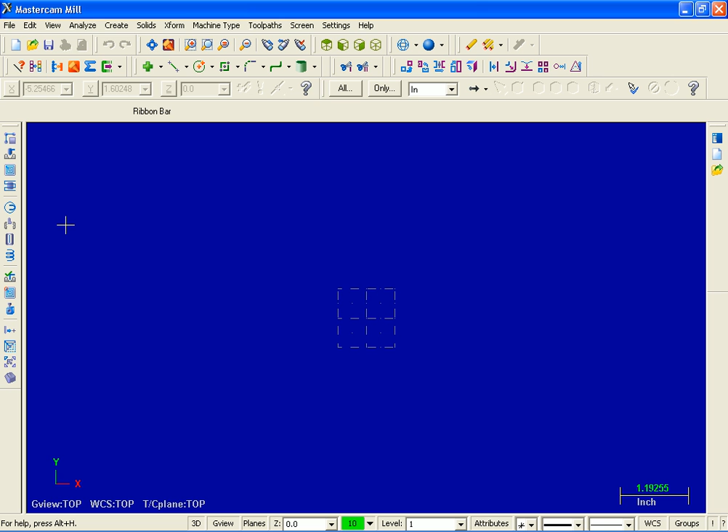I've moved up to the top left hand corner of the screen and I'm going to select the new part icon. Next I'm going to hit Alt-O on my keyboard to turn off the operations manager. It works just like a toggle switch. If I hit Alt-O again, it will reappear. The center of this grid is x0, y0.

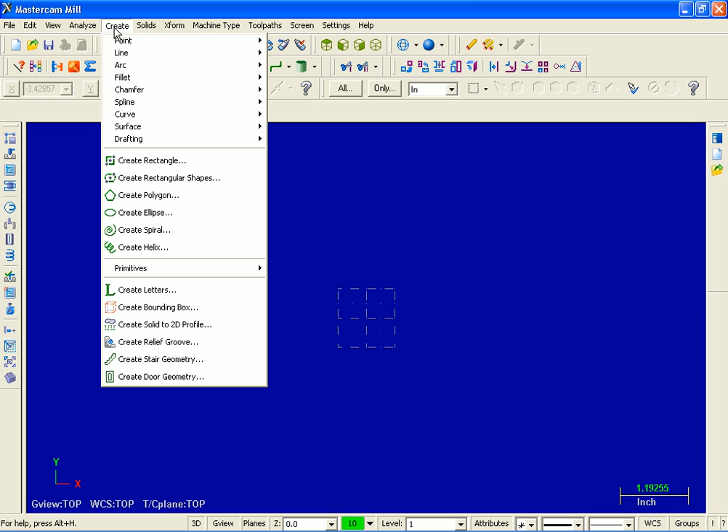In step 1 we're going to create half the outside boundary. What I'm going to do is move to the top of the screen and select Create, and then move on down and select Create Rectangular Shapes. The first thing I'm going to ensure is the radio button beside base point is turned on. Next I'll input the width and height of this rectangle.

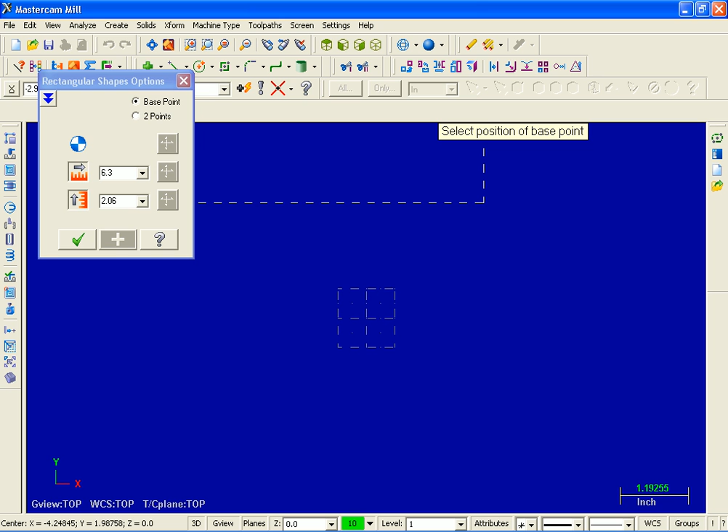I'm going to move on down and click in the white space for width and type in 6.3, enter. Next I'll move on down and input the height, 2.06, enter. Next I'm going to select the double arrow to expand the rectangular shape options. Moving down to the bottom of this dialog box in the anchor section, I'm going to select the upper left corner radio button as the anchor for this rectangle.

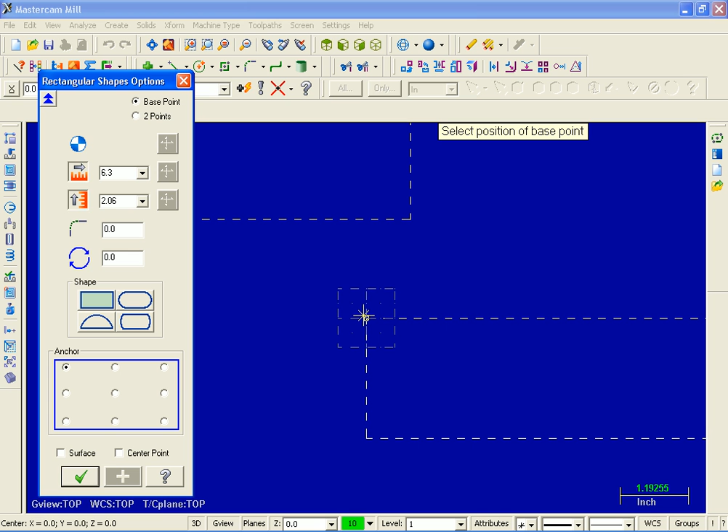As you can see on the graphic screen now, the anchor point is the top left hand corner of this rectangle. Now I have a prompt on the screen: select position of base point. What I'm going to do is pick the center location of the grid, the origin. Moving back to the rectangular shapes options dialog box, at the very bottom I'm going to select the OK button. Next I'm going to move up to the toolbar and select the Fit icon.

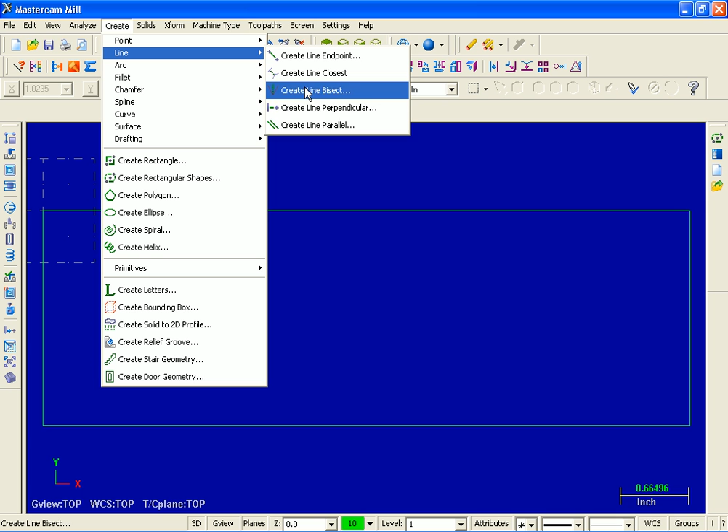Let's move on now to step 2. We're going to create the inside geometry. We're going to create parallel lines. I'm going to select Create Line, and then right at the very bottom here, Create Line Parallel. The prompt on the screen, select a line. The first line I'm going to pick is this top horizontal line, so I'll select it. And then the next prompt, select the point to place a parallel line through. I'm going to pick a point below this line.

Moving on up, I have to input the distance. Its distance is already highlighted. I'm going to type in 0.8, enter. Everything's looking good. So to continue using the same command, I can select the Apply button. To exit the command, you can either start a new command or select the OK button. What I'm going to do is select the Apply button.

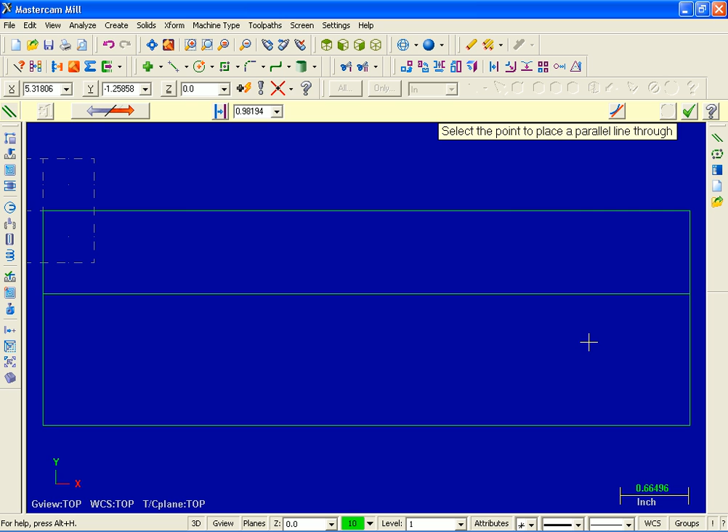Now for the next parallel line, when prompted, select a line. I'm going to select this right vertical line, and for the next prompt I'm going to pick a point somewhere to the left. Next I need to input the distance. The distance is highlighted. I'm just going to type in 0.94 and then hit enter. Everything looks good. I'm going to move up and select the OK button.

Next, we're going to do some trimming. I'm going to move up and select Edit, Trim Break again. I'm going to move down to the graphics screen, and when prompted, select the entity to trim extend. I'm going to select the vertical line on the left. For the next prompt, I'm going to select this horizontal line. As you can see, part of this vertical line has been trimmed to this horizontal line.

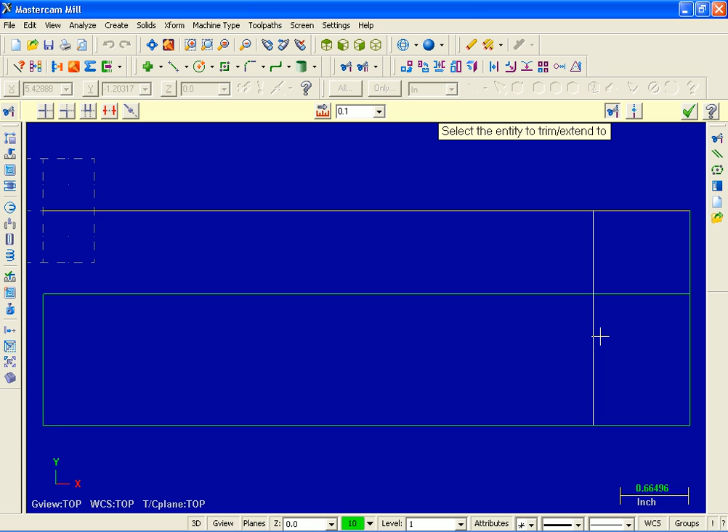Let's continue with our trim operations. I'm going to select this top horizontal line, followed by this vertical line. And as you can see, this horizontal line has been trimmed to the vertical line. That completes my trim operation. I'm going to select the OK button.

Next, we're going to create a fillet between this vertical line and horizontal line. I'm going to select Create, Fillet, Fillet Entities. The radius for the fillet I'm about to create is 0.25, which is what we have set. The prompt says select an entity, so I'm going to select this vertical line, followed by this horizontal line.

Everything looks good. The reason the lines have been trimmed is because we have the trim button set to on. So everything looks great here. I'm going to pick the OK button.

Next, I'd like to delete this horizontal line. I'm going to move up to the toolbar and select the Delete Entities button. When prompted, select entities, I'm going to pick the line and then move on up and select the End Selection icon.

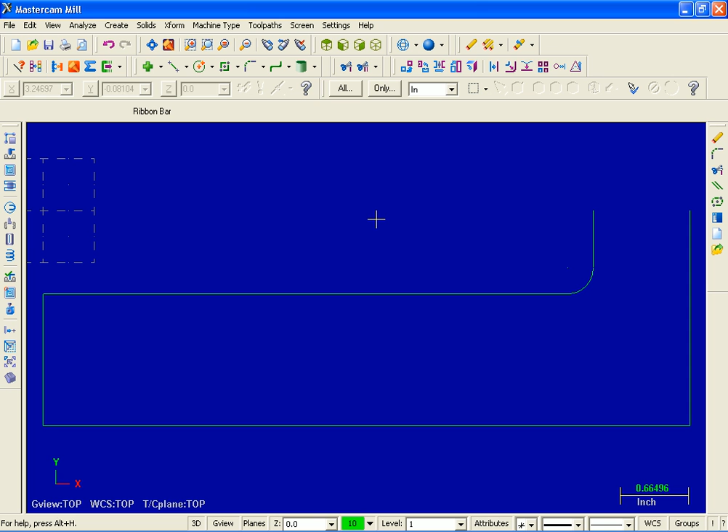Step 3, we're going to complete the outside profile. We're going to create a 45-degree chamfer in here.

Let's move up, select Create, and then move on down, Chamfer, Chamfer Entities. Now the first thing we're going to do is input the distance. This chamfer distance is 0.75, and then moving along I have my distance set to 1, and also note my trim is set.

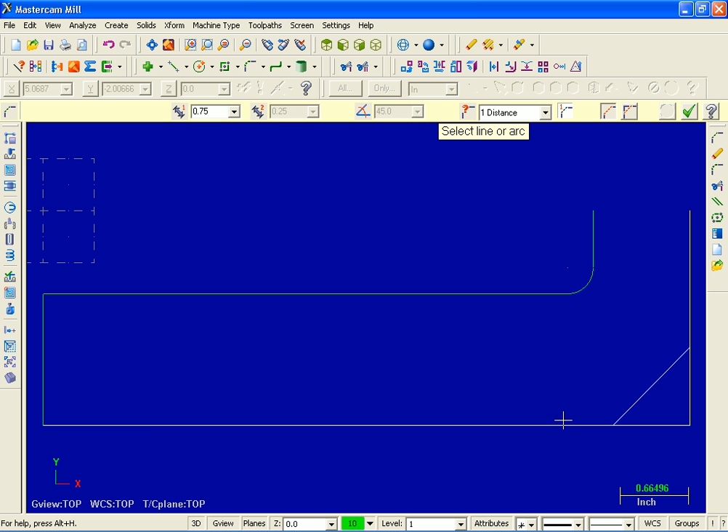Moving on down to the graphics screen, I'm going to pick the right vertical line and then this horizontal line down the bottom, and the chamfer looks great. Going to move up and now press the OK button.

Next, we're going to put a fillet in this bottom left corner. Create, Fillet, Fillet Entities. Now, our radius this time is 0.56. I'm going to click in the input area and type in 0.56, then enter.

I'm going to move the cursor down to the bottom left hand corner, and you'll notice that it's previewed my fillet. My fillet is exactly where I want it, so instead of picking any entities, I'm just going to pick here, and it looks great. I'm going to move on over and hit the OK button.

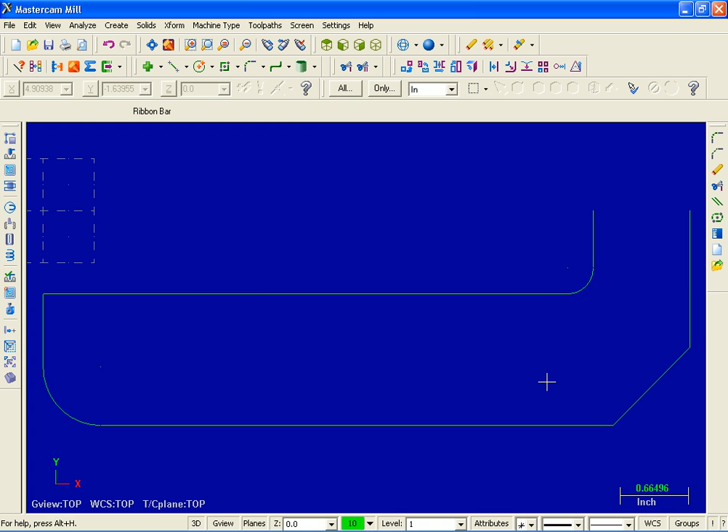Next, we're going to create two circles. Create, Arc, and we're going to use the Create Circle Center Point. Now, the diameter value for these circles is 0.5. So I'm going to move up to the diameter selection and input 0.5, enter. Also, what I'm going to do is click on and lock these values in.

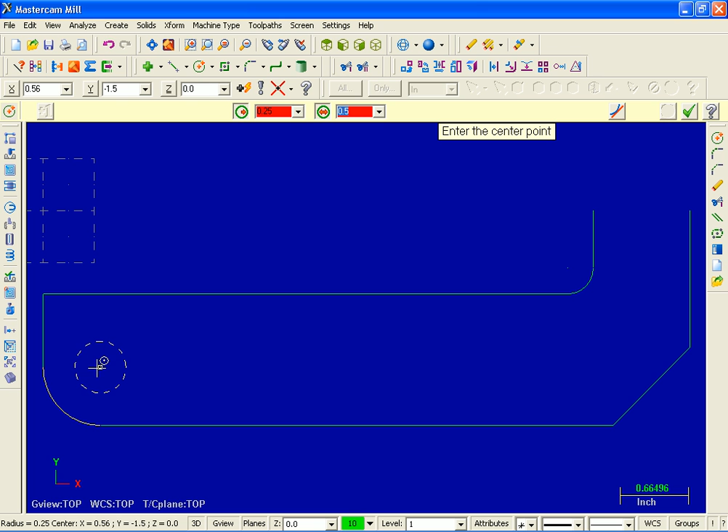Now, enter the center point. I'm going to move down in the lower left corner, and this circle, this first circle, shares the same center point as the fillet that we just input. So I'm going to click. There it is.

Now, for the next circle, what we're going to do is input the X and Y center values. So I'm going to move on up and select the fast point icon. In this window that opens, I'm going to input the X and Y values. For the X, 0.56 plus 3.5. So that's the X value, comma, and for the Y, minus 1.5, enter.

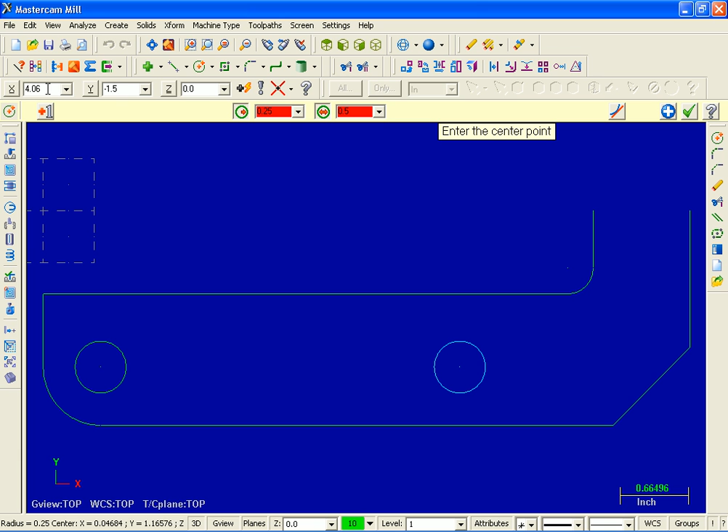And there's our circle. Both circles are complete now. I'm going to go up and hit the OK button.

Next, we need to mirror these entities. I'm going to select X-Form at the top and then move on down and select X-Form Mirror. Now I'm prompted to select entities to mirror. I'm going to move up and select the All button.

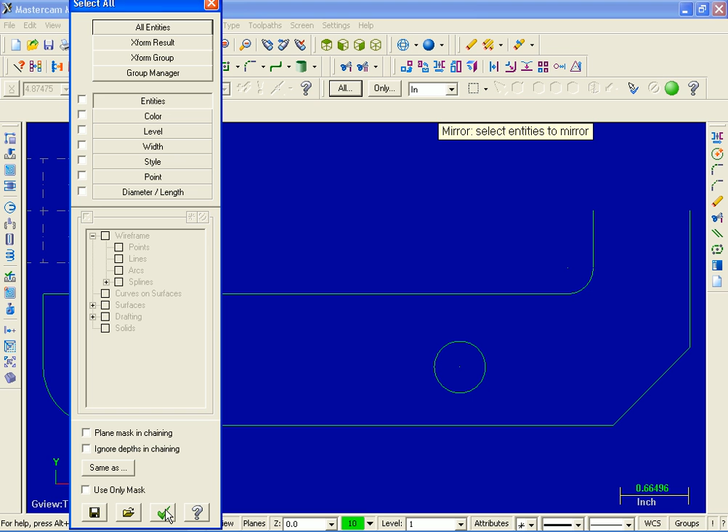Over in here, right down the very bottom of this dialog box, I'm going to select the check mark for OK, and as you can see on the screen, everything has been selected. I'm going to move on up now and select the End Selection icon.

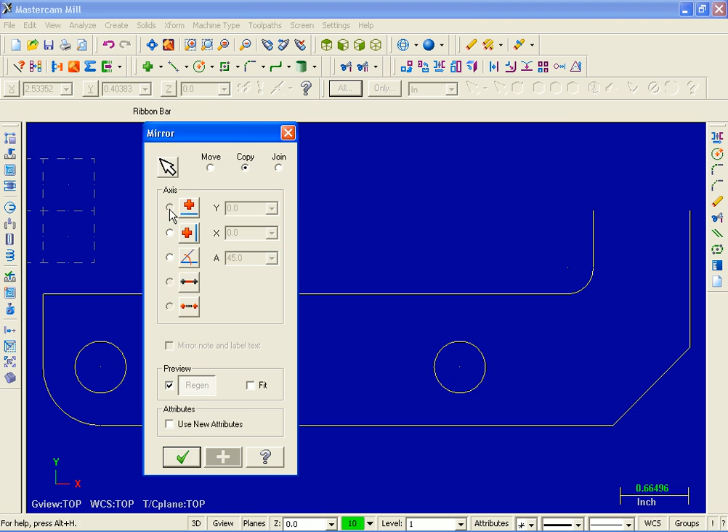Now, in the Mirror dialog box, I have the radio button against copy selected. I'm going to move on down and select the radio button to mirror about the X-axis. Right at the very bottom in the preview section, I'm going to select Fit, and as you can see on the screen, everything looks pretty good. So I'm going down to the bottom of this dialog box and select OK.

Next, I'm going to clear the colors. I'm going to move up and on my toolbar button select Clear Colors, and everything looks great.

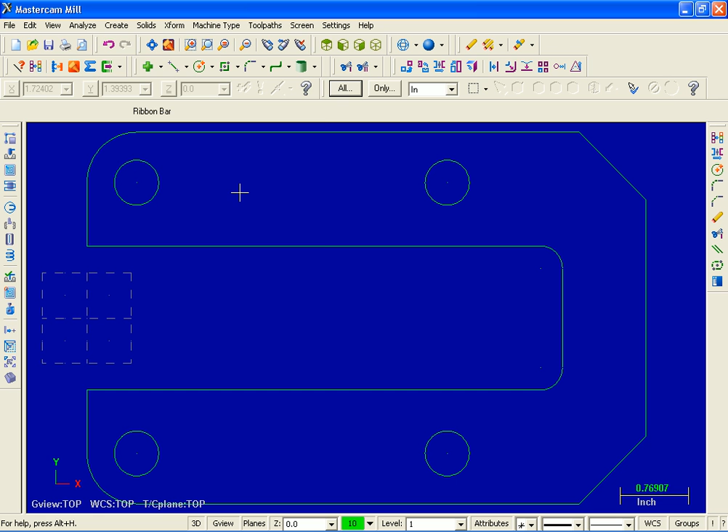The last step, save the file. File, Save As, and what you can do now in the file name area is type the name of your file. Once you've done that, you can select the Save icon.